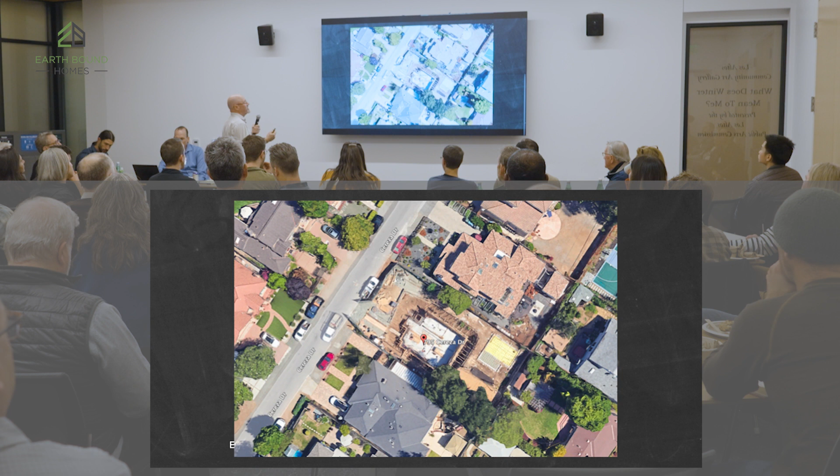Next up, a site plan of our building on Cereza Drive. Our north arrow is in the upper left-hand corner of the site. We have photovoltaic panels facing west-southwest, which is really good for a grid intertie situation and contributing to the grid when loads are greatest.

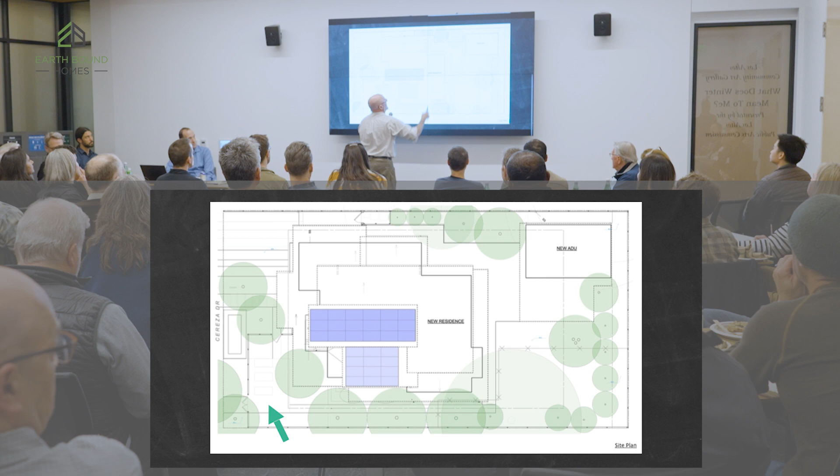Residence here, and then the ADU in the south corner, east corner.

View of the project from the street. We're utilizing an EcoCocon panel system, and we'll come out and visit on April 20th to see that in person. There's a wall that runs down the length of the central hallway of the house, starting at the front yard and carrying that line through—a combination of fiber cement panel space system and some salvage redwood. We'll get a look at some details of that.

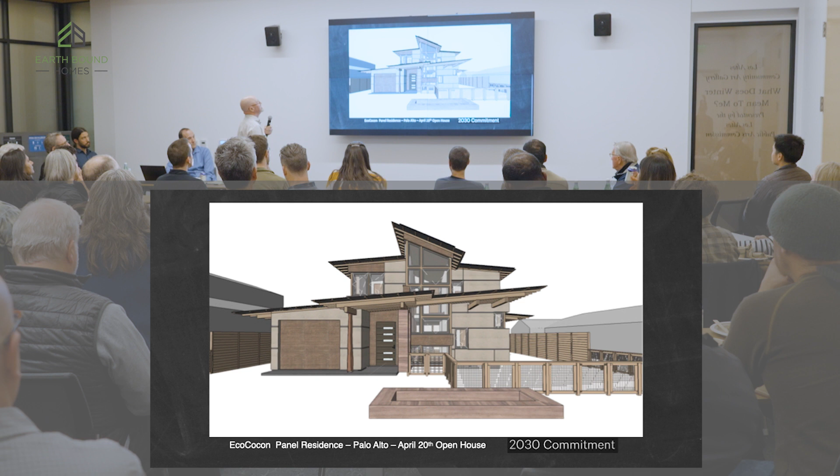Working in Palo Alto, we have a building envelope, and those of you who've done work here know it's shaped simultaneously to preserve daylight for neighboring properties. This ends up creating a shape that really wants to encourage traditional architecture, and sometimes it won't free itself from that. It's something a little more contemporary, which was the case here.

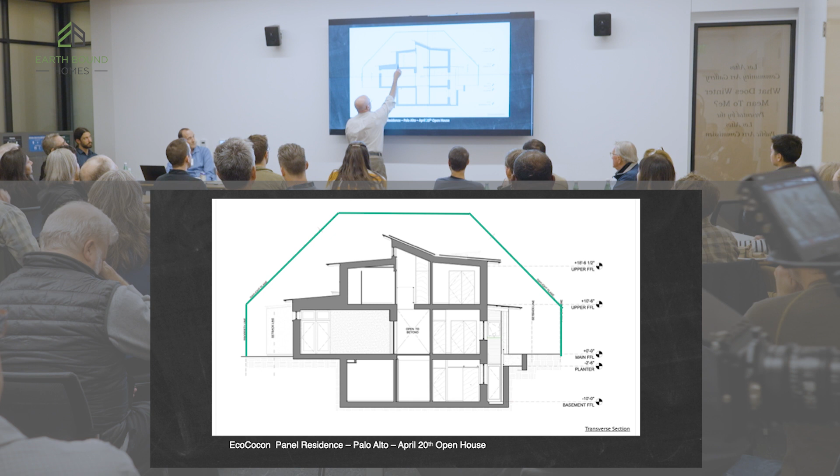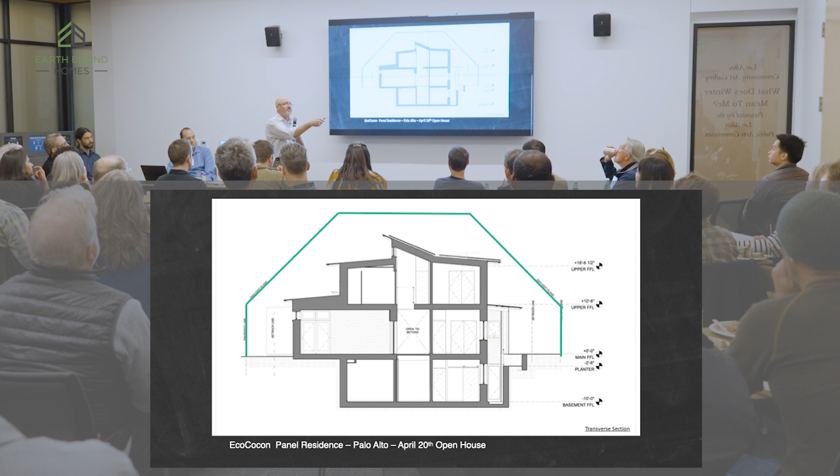In order to stay within that daylight plane height limit, we found ourselves stepping back the exterior walls of the upper floor from the exterior walls of the lower floor. That takes a bit of structural gymnastics, which we talked about. Some of our carbon impacts frankly came from the steel resources we had to use to make that shape.

Next, a quick run through the floor plans. Single car garage with additional parking above it. We have an entry flanked by the rammed wall panels on one side and a eucalyptus column that was being cut for fire resilience, defensible space down in Pescadero. A central hallway leads to kitchen, living, dining, opening up to the backyard. This faces southeast, so having lots of glazing in that direction is really important for both solar gain and connecting to the yard.

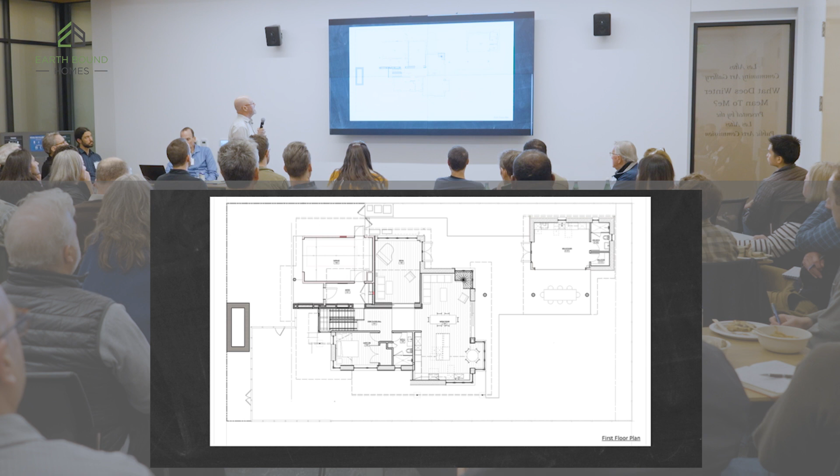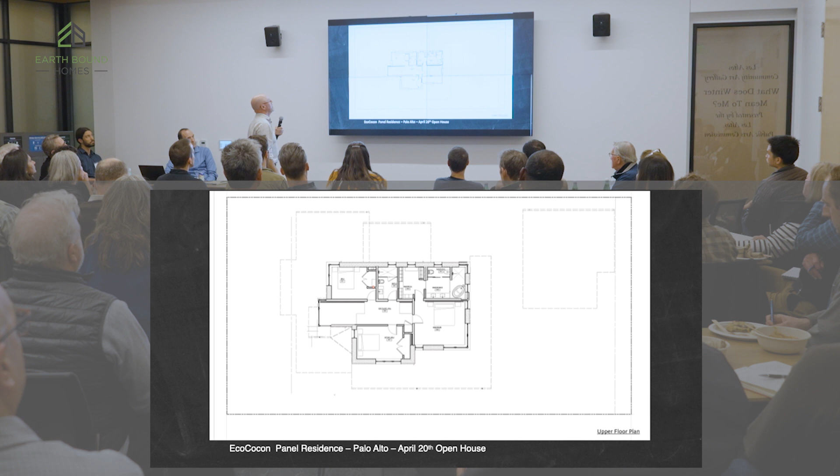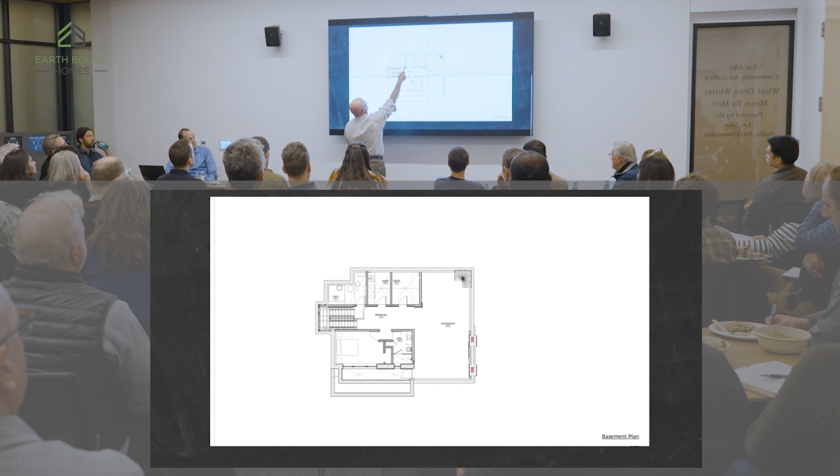Taking a quick view upstairs: a stairway leads to a hall with three more bedroom and/or office spaces and a couple of bathrooms. Then the basement—that stair connects down to a multi-purpose space, another bedroom and office, laundry and storage. So that's a quick orientation to the house we're talking about.

Now a big jump to what's happening on site—this project is under construction. EcoCocon is a straw panel system manufactured in Eastern Europe. These panels actually made their way across the ocean on a slow boat, then took a train from Houston to the Bay Area, then a truck from Oakland to Palo Alto.

And there they are—the first walls assembled were the ADU at the site. But now I think all the panels are in at this point. Next, just a couple of the details.

Not unlike straw bale construction, we have sill plates with insulation between them that keep the straw up and away from the foundation, for moisture protection so we don't have moisture migrating into them. In the case of the eco panels, they come with framing members at the corners, so framing out windows and doors comes quite naturally. I could go into all the different ways we can do that with straw bale construction, but would encourage you to buy CASBA's Straw Bale Construction Tips.

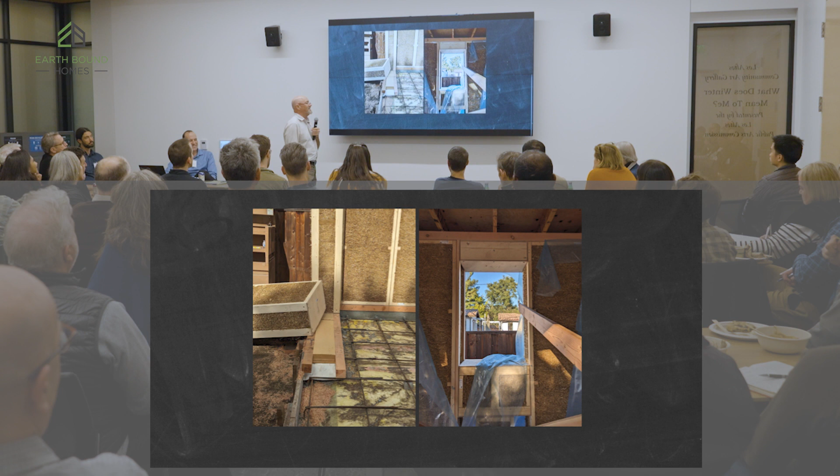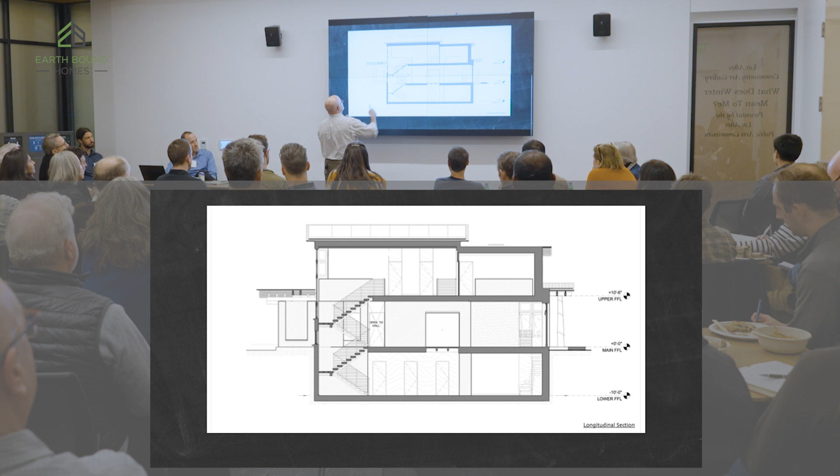Building section cut in the other direction. Let's go to the next slide so we can start to get into the palette of materials.

This is a better view of that hallway stairway with the render panels. The stair treads are being cut from an urban forestry outfitted East Bay valley oak that's being used for those. That's the whole palette of materials.

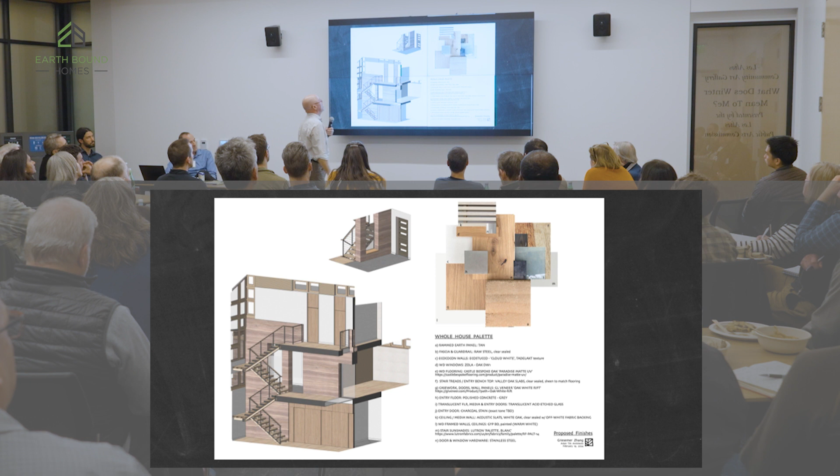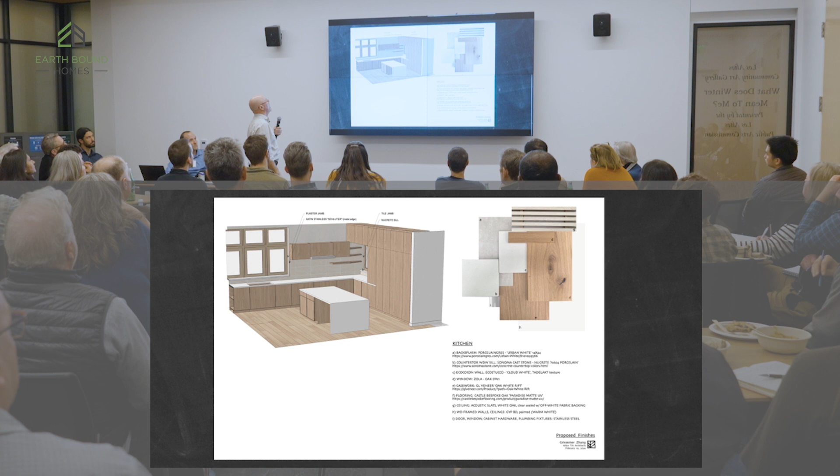And then to the exterior palette: eucalyptus columns, salvaged redwood siding that spent its life as partitions in an ICBM missile silo in Los Angeles—repurposing it, swords to plowshares. And then fiber cement panels, with very similar detailing used here on the other project. Next up.

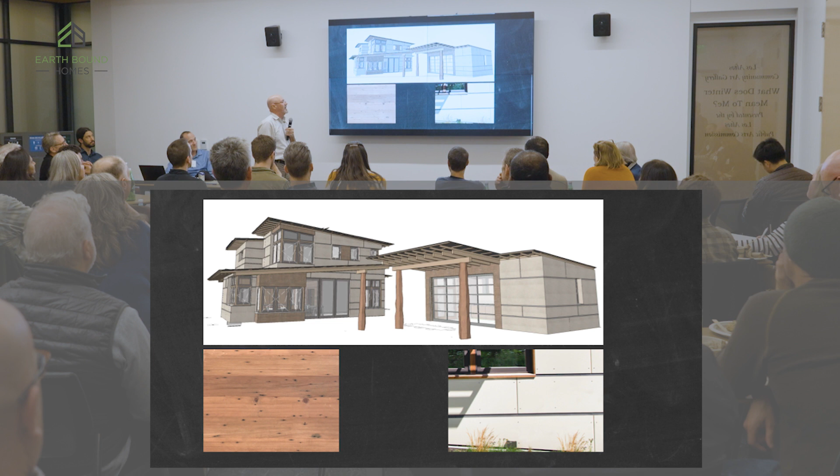So we've done some preliminary carbon calculating, and it's always interesting to see the numbers and the comparisons of the impacts. Given that we have a basement in a very seismically active Bay Area, in Palo Alto, where they don't de-water the ground, you have to assume, like you're in a lake, that all the weight of the water is pushing against the basement walls. As I mentioned, some structural steel helps stand some areas, so those are the bigger impacts.

We get into doors and windows, and remarkably less carbon impact in the walls, floors, and roof. This shows what those numbers would be if we used a traditional concrete mix as opposed to a low carbon mix, and gets into some detail on those.

And then the amount of carbon saved by using better concrete. This is a number we want to see go up with more material choices in more buildings, and bring those other numbers down.

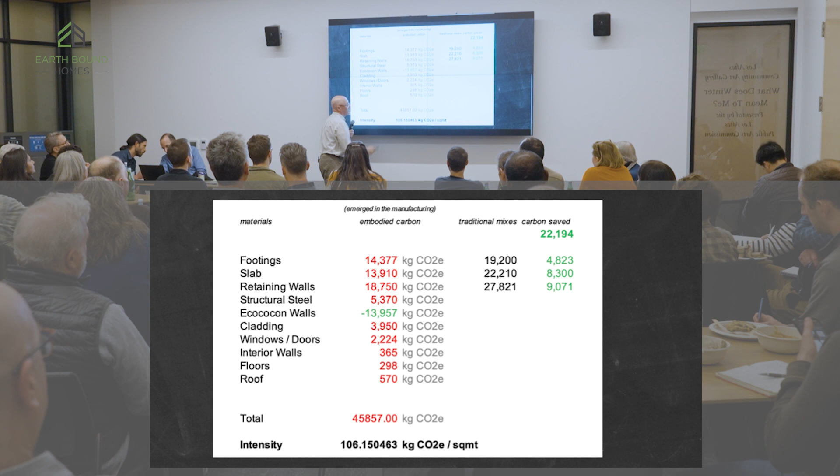So 106 is where we landed, compared to the average as measured by the Carbon Leadership Forum, the group promoting understanding and reductions in embodied carbon at the University of Washington. 400 is the average across all building types reported. Closer to 200 becomes the average when we're talking wood frame, whether single family residential or low-rise commercial. So we're running at about half of what the residential average would be.

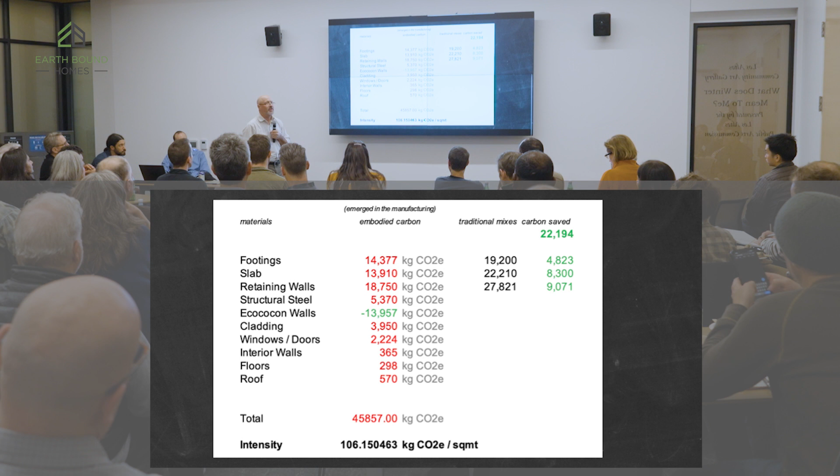So I'm feeling pretty good about it. But, as I said at the outset, we need to get to zero.

If we go to the next slide—the reason I'm able to be here today is because I'm not on my way to Ashland, where we were going to have a straw bale raising work party on a 4-unit townhome project, where we're using straw bales not only for the exterior walls but also the party walls between those townhome units.

And with that, and some other reductions in not having a carbon-intensive foundation—we actually worked with the local cement company to bring their mix down—we're able to get this project to 21.

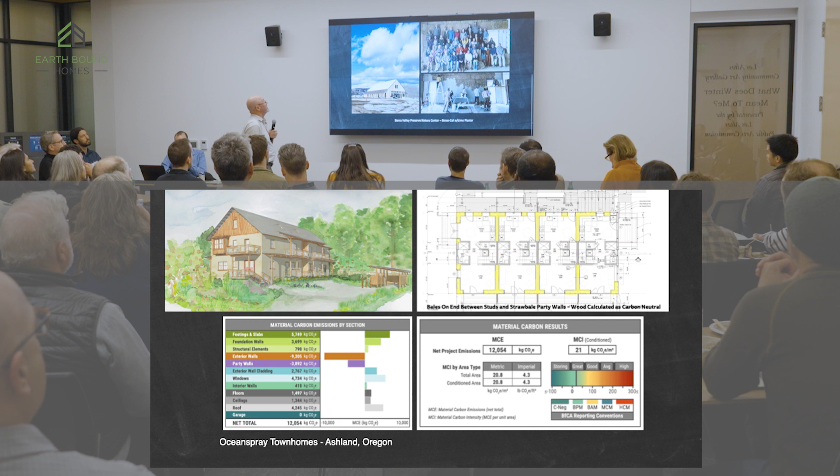And with Verdant—go to the next slide—with Poe. I just wanted to show this is what happens when we build with straw bale. Traditionally, if we get a bunch of people together, we have a really good time.

Some of those folks were local farmers who came out to help. They had a lot of fun, and they knew their way around the straw bale too. I think that was impressive.

Okay, next. With Verdant and Terra and some other partners and a grant from StopWaste, we asked: could we build buildings that actually store carbon? Through some very aggressive efforts, I won't go into detail on all of them, but we did analyze the straw bale system we were proposing here.

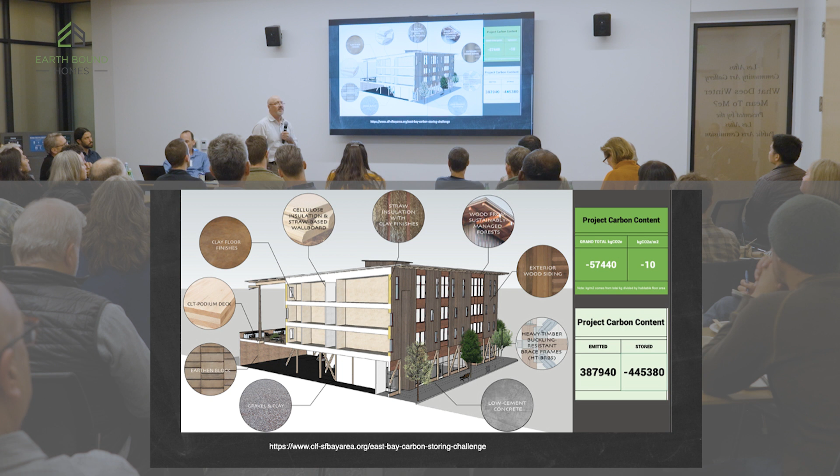We're actually able to show that, yes, we can store carbon in buildings. I think our ultimate hope is that buildings—because if anything we're going to keep doing as human beings on this planet is building shelter for ourselves—if the built environment can become the Earth's sixth carbon sink, we're going to go a long way toward stopping runaway climate change.